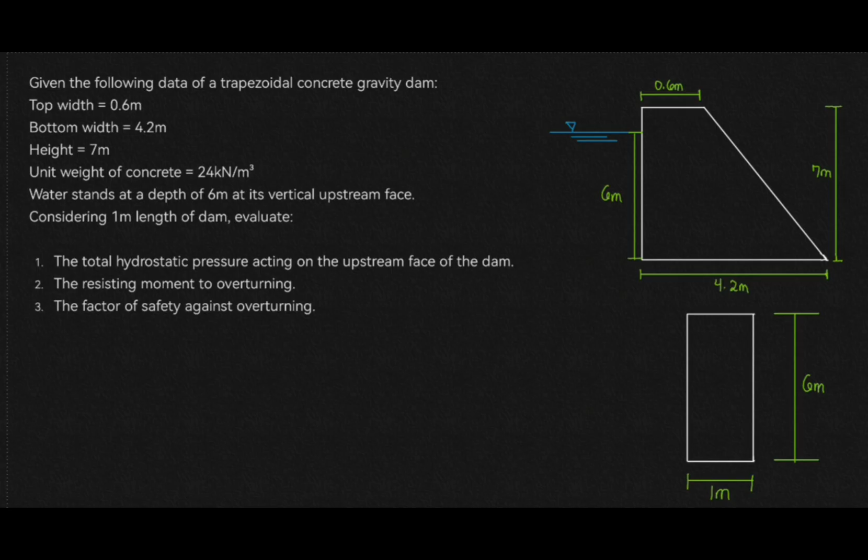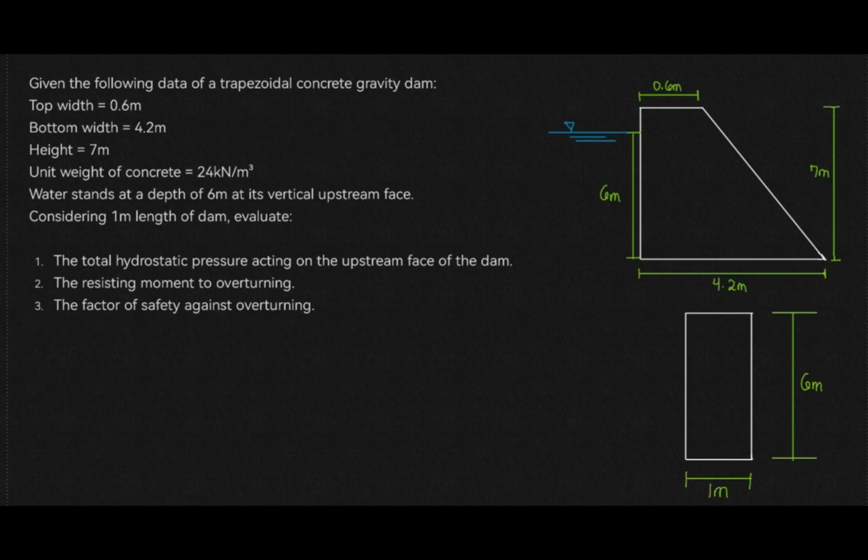So another problem for hydraulics, specifically gravity dams. If ever this comes out in the board exam, it's a bonus. It's like automatic points for that question. You must master this and fully grasp the concepts, because it would be a waste of points if it comes out and you haven't mastered it. I don't know if this came out before, I don't remember, but in some past exams it came out, not in HGE but in PSAD. But the process is the same, the way you answer is still the same.

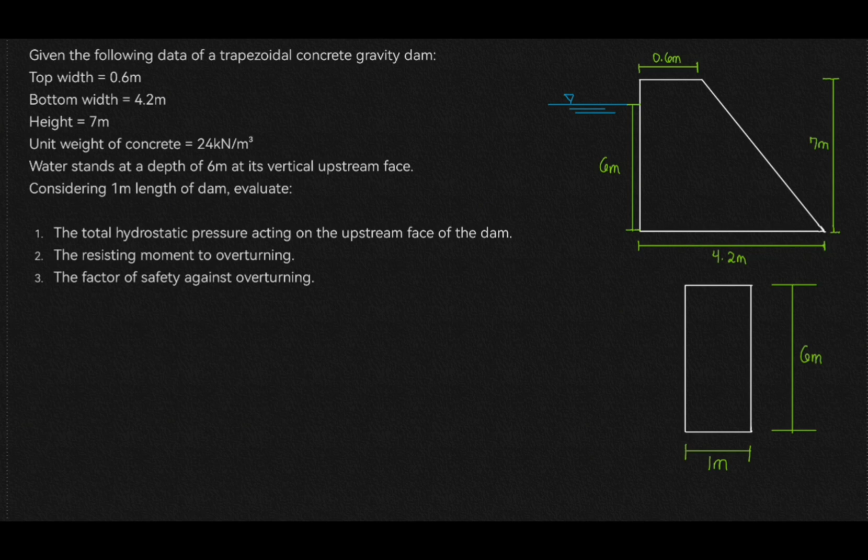Given the following data of a trapezoidal concrete gravity dam: top width 0.6 meters, bottom width 4.2 meters, height 7 meters, unit weight of concrete 24 kilonewton per meter cube. Water stands at a depth of 6 meters at its vertical upstream face.

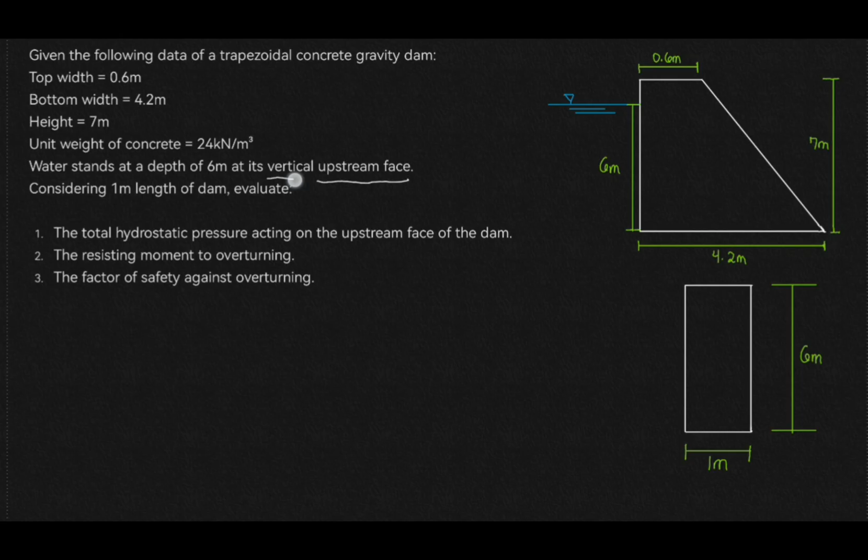So what do you mean by upstream face? Upstream face is the wet side of the dam. So where is the wet side of the dam, wherever the water is. In this case, since it's stated as vertical, it's on the vertical side, not on the slanting side, since this is a trapezoid.

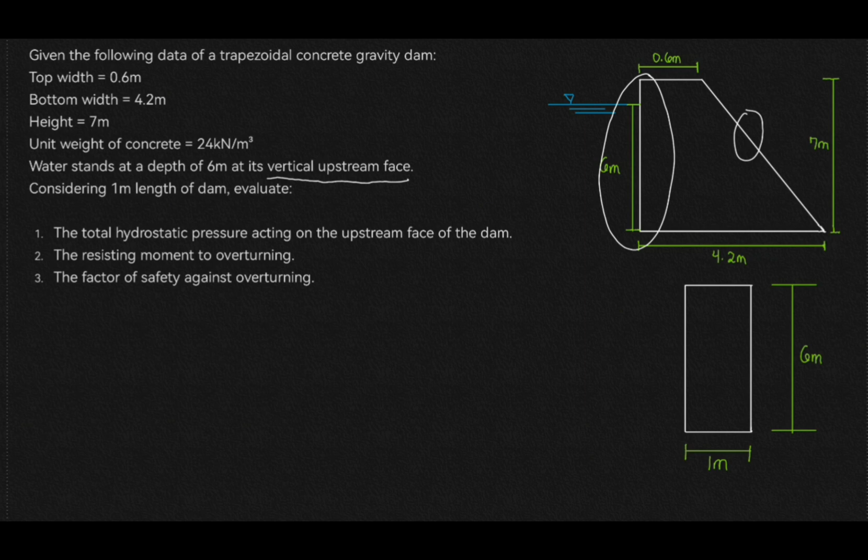And then considering 1 meter length of dam, evaluate number one, the total hydrostatic pressure acting on the upstream face of the dam. So that's just the total hydrostatic force. So, solution.

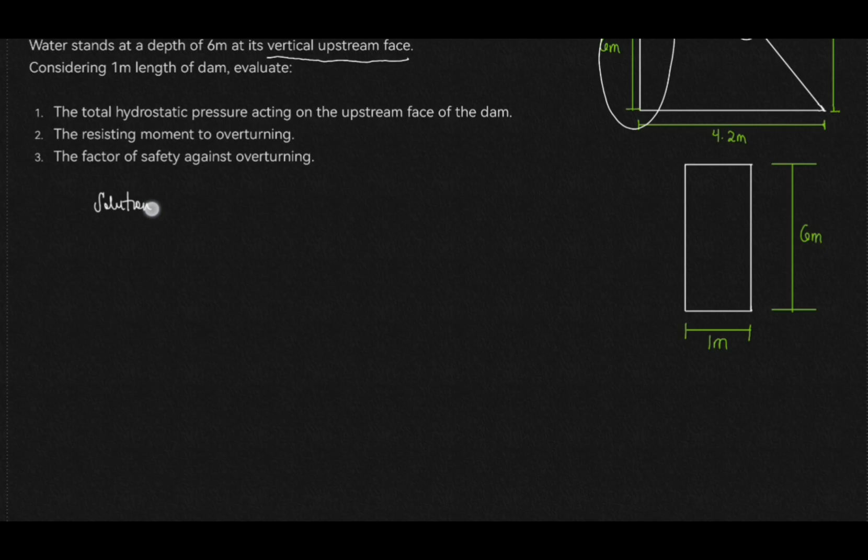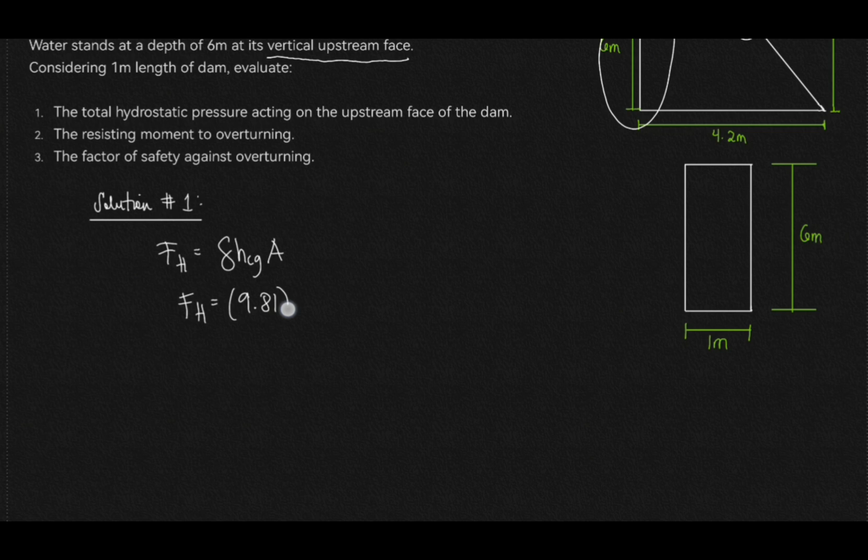Total hydrostatic force formula: gamma times HCG times A. Gamma is 9.81 since it's water. HCG - this is not the HCG of the trapezoidal dam.

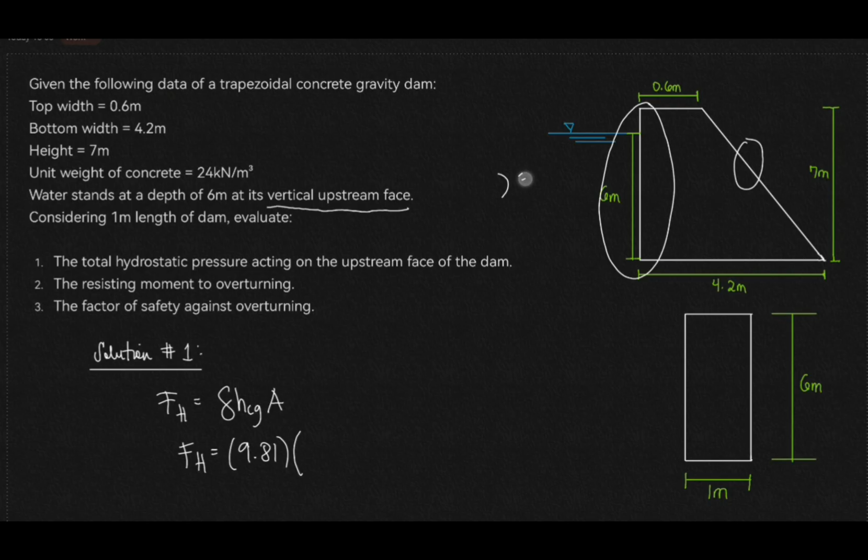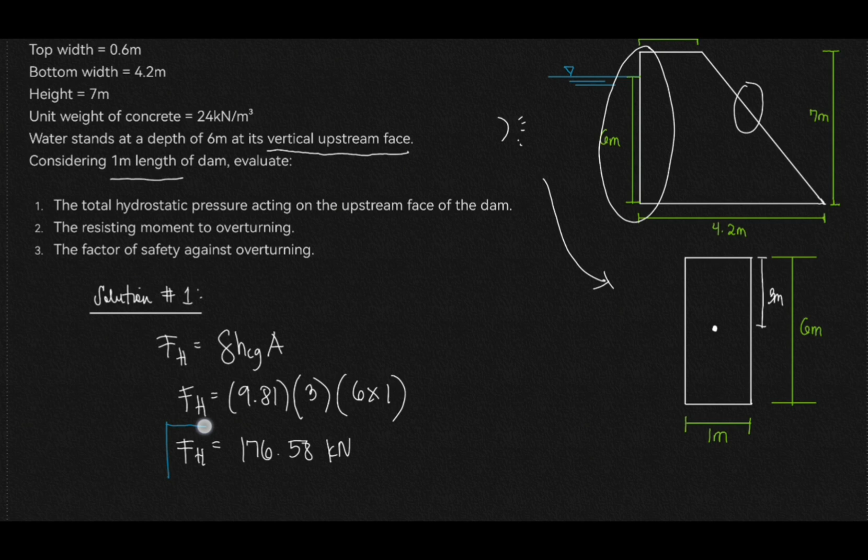So in short, this is 3 meters. So area is 6, which is 6 times 1. So that would be 176.58 kilonewton. So that's our answer for number 1.

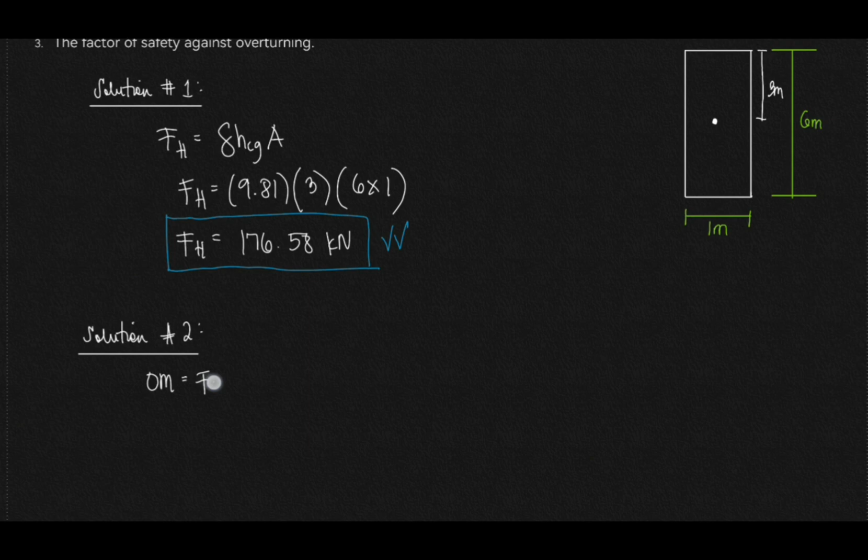So number 2, what we're looking for is the resisting moment to overturning. So the overturning moment, OM, is the hydrostatic force FH times the distance - moment is force times distance, but in this case our hydrostatic force is located here. FH, where is this located? Since this is water, its pressure distribution is triangular.

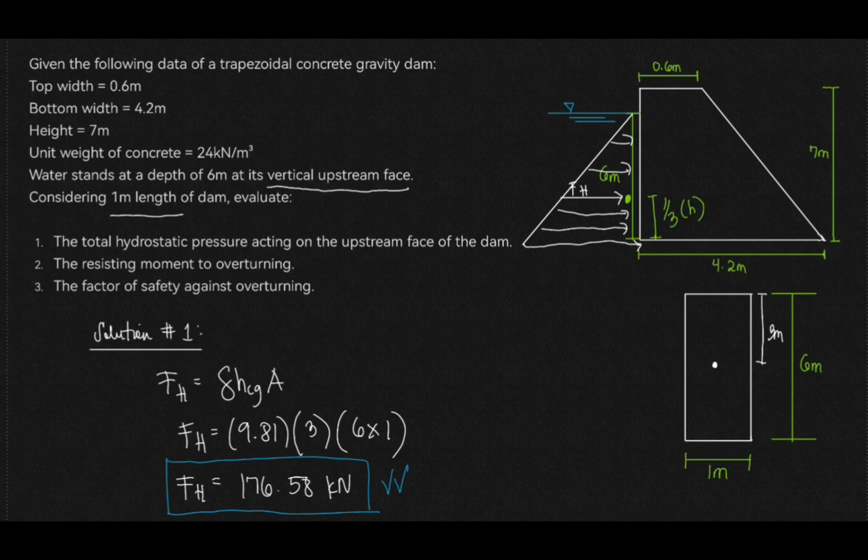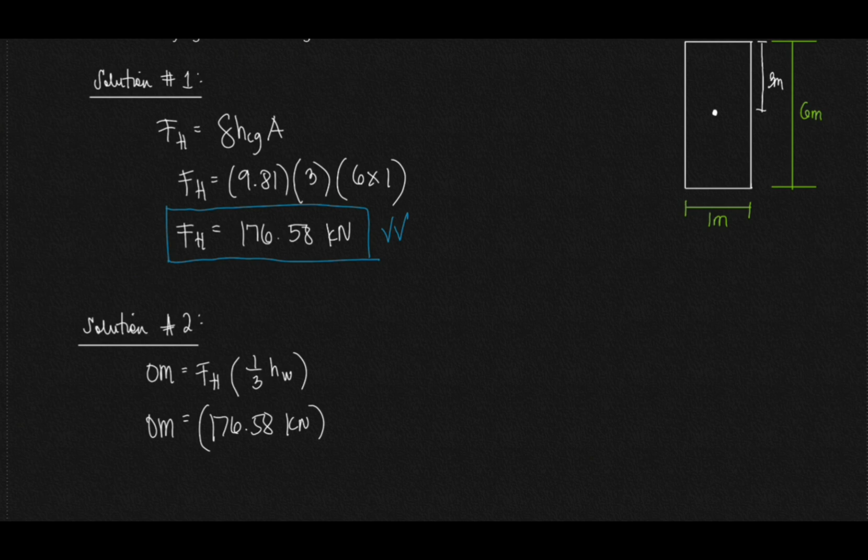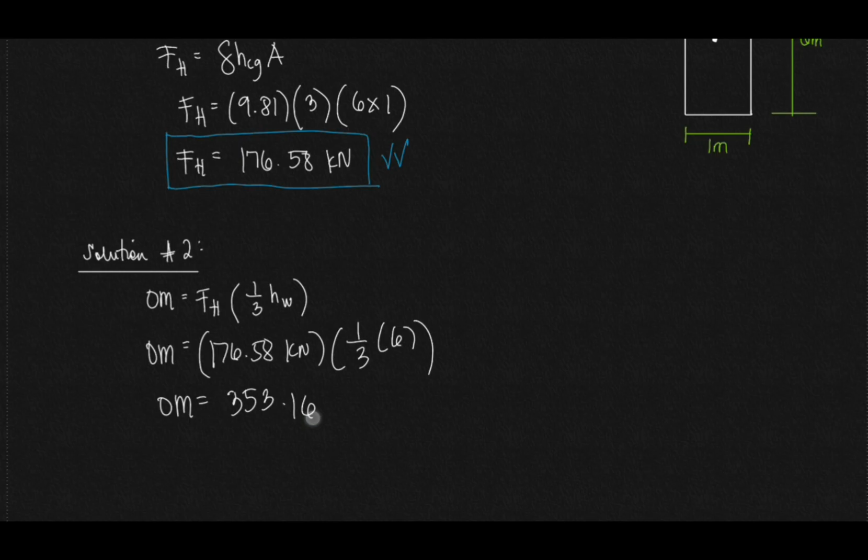So for the triangle, where is FH located - that would be 1/3 of the height of the water, right? Since it's a triangle. So in this case, 1/3 of the height of water. So the overturning moment: our FH is 176.58 kN times 1/3 height of water which is 6. So that would be... 353.16 kN-m.

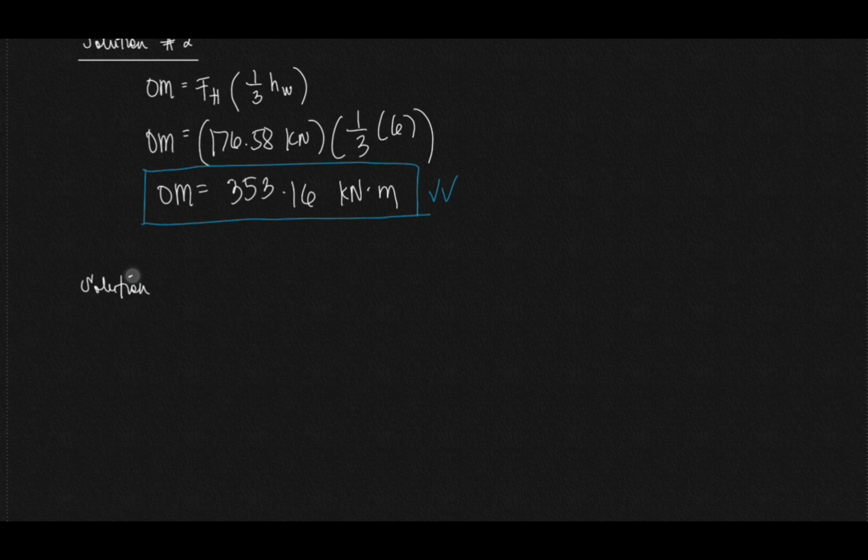So number 3, this is the factor of safety against overturning. So the formula for this is RM, the resisting moment, over OM.

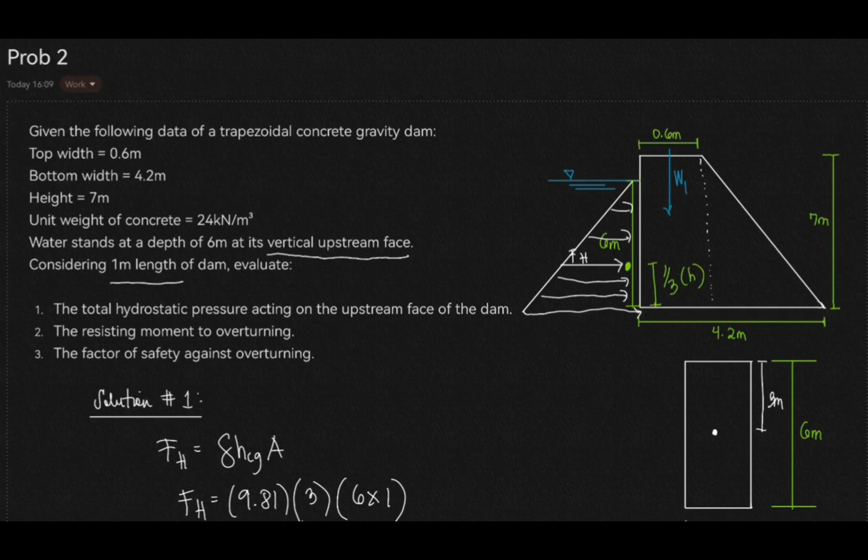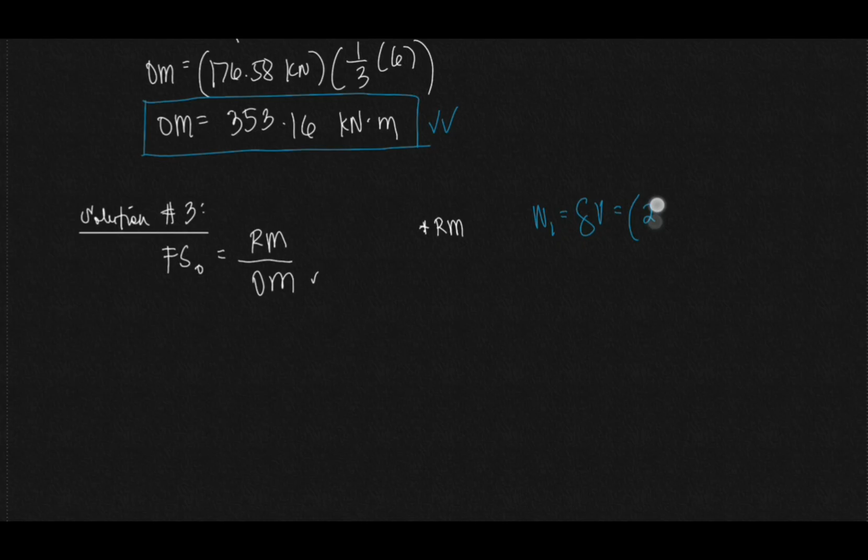So we have weight 1, which is here, and another weight here - that would be weight 2. Weight 1 is just gamma times volume. Gamma is 24, volume of this rectangle is 7 times 0.6 times 1. So weight 1 is 100.8 kN.

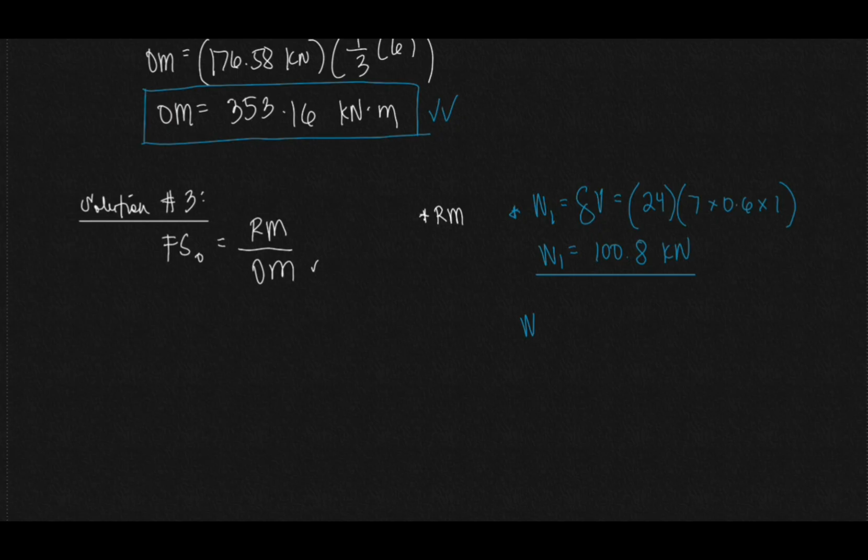Weight 2: gamma times volume, gamma 24. Since weight 2 is a triangle, it's 1/2 base height times 1, 1 being the length. So 24 times 1/2, our base is 4.2 minus 0.6, which is 3.6, height 7, times 1. So weight 2 is now 302.4 kN.

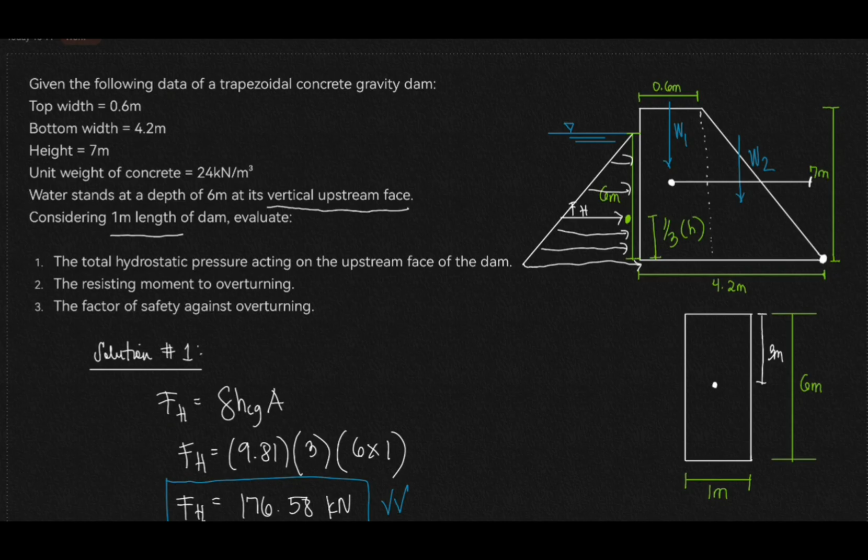So since we have the weight of the dam, we can get the RM. RM is weight 1 times its distance from the toe to its center. Where is the toe in this case? So the CG is here at the middle. So what's the distance? The whole distance is 4.2 minus half of 0.6, which is 0.3. That is 3.9.

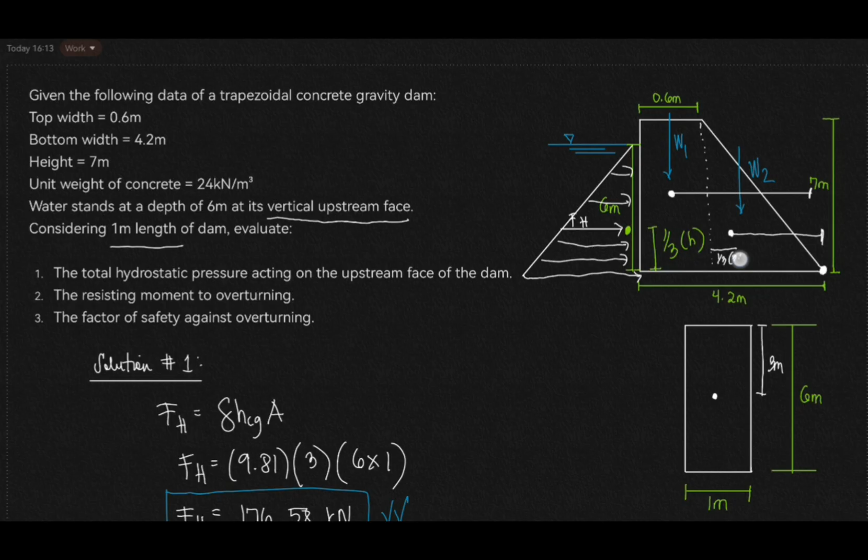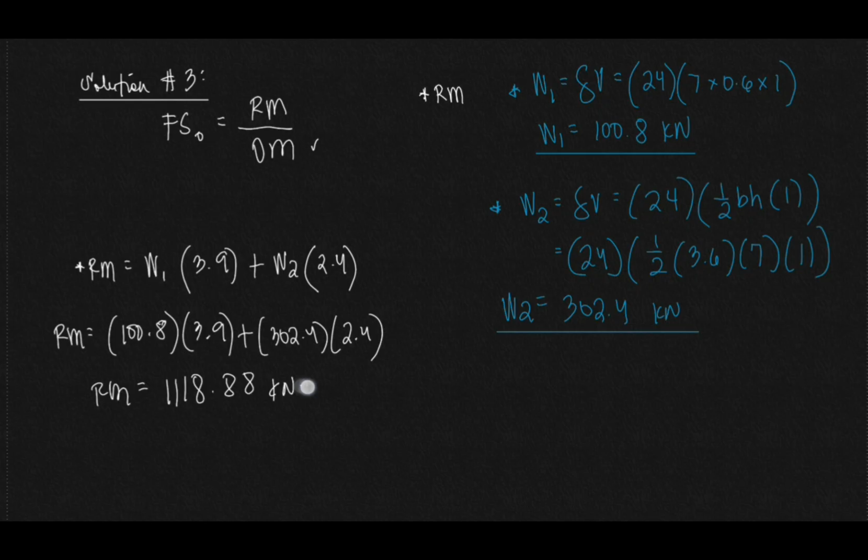Plus weight 2. Weight 2's center is here. The distance: 4.2 minus 0.6 is 3.6. So 3.6 minus 1/3 of 3.6, that would be 2.4. Weight 1, just substitute it directly. So that would be 1118.88 kN-m. So now we have RM, we can get the factor of safety.

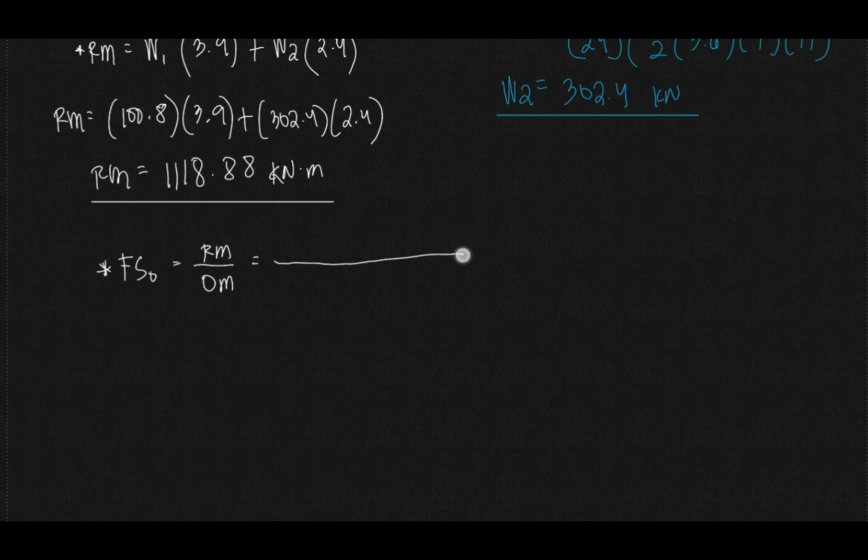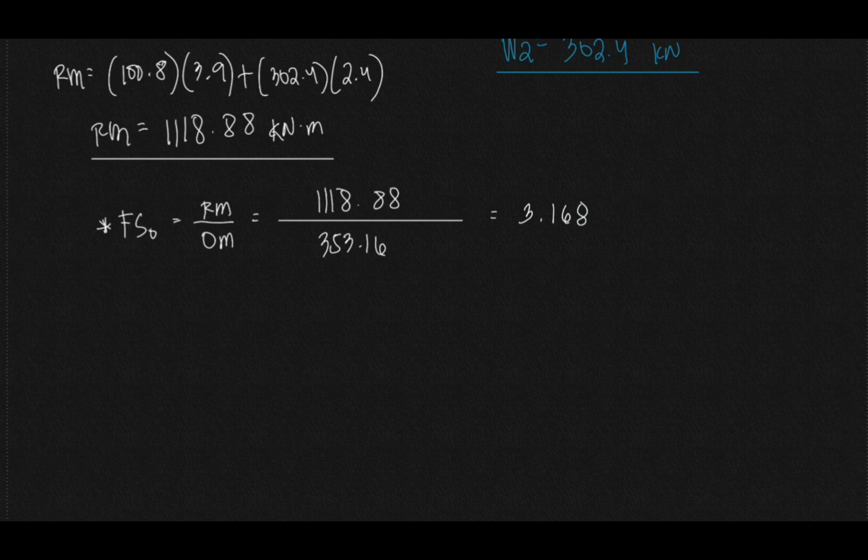So let's go back. Factor of safety against overturning: RM over OM. RM is 1118.88, OM is 353.16, that gives us 3.168. So that would be our answer.